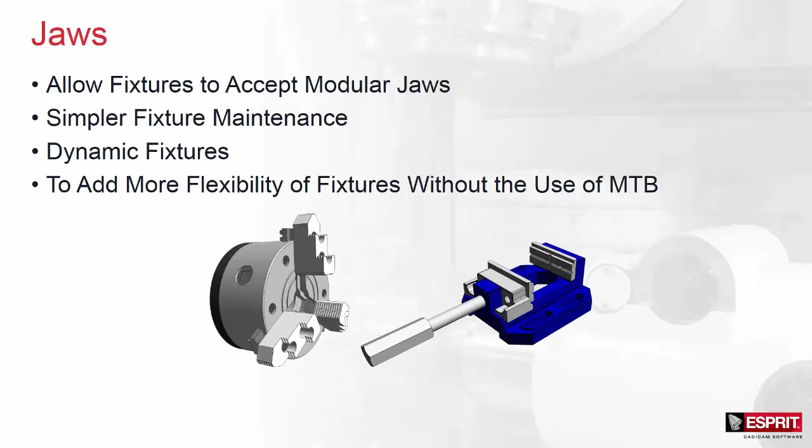Hi, welcome to the presentation of the new feature Jaws for ESPRIT TNG milestone 3.2. This new feature allows fixtures to accept modular jaws, which also leads to simpler fixture maintenance. Now we can just swap jaws in and out for our chucks or vise fixtures without having to make a new fixture just because we swapped out a jaw.

Next, we have a list of some of the new features. First, we can change the clamp direction. So now instead of having an OD chuck and an ID chuck, we can just have one chuck fixture, and with a simple click of a button in ETNG, we can swap the direction in which that chuck clamps.

Second, we can change the clamp position. So depending on the travel limits, maybe you want to extend or make them smaller, you can change the clamping position easily inside the UI. Third, we can do some model positioning. If you saved the solid wrong or you have a uniquely designed chuck fixture, you can position the jaws accordingly.

And lastly, you can save assemblies. So now if you have a chuck and let's say you use this chuck consistently and you don't want to keep adding the same jaws over and over to that file, you can right click and save that fixture assembly.

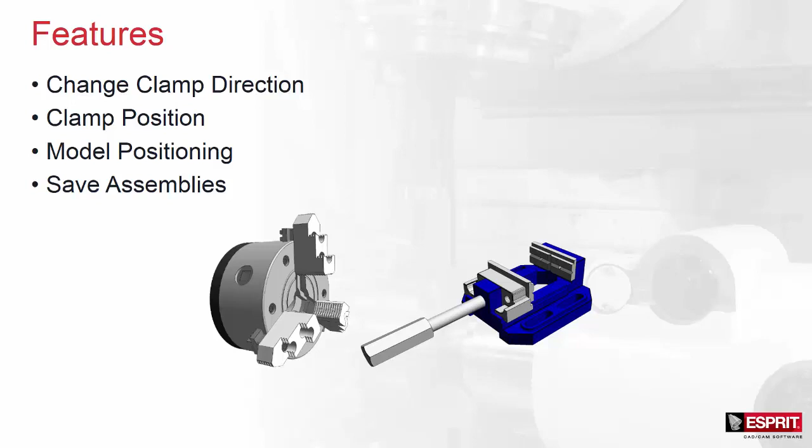So let's go ahead and see what this looks like in ETNG. So you can see here I have my fixture file loaded up. There's nothing different than how we saved fixtures before. The origin still denotes where the workpiece adapter and fixture adapter location is.

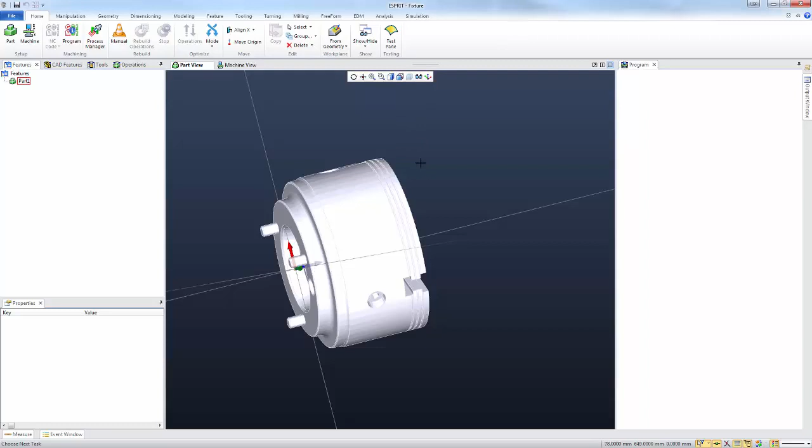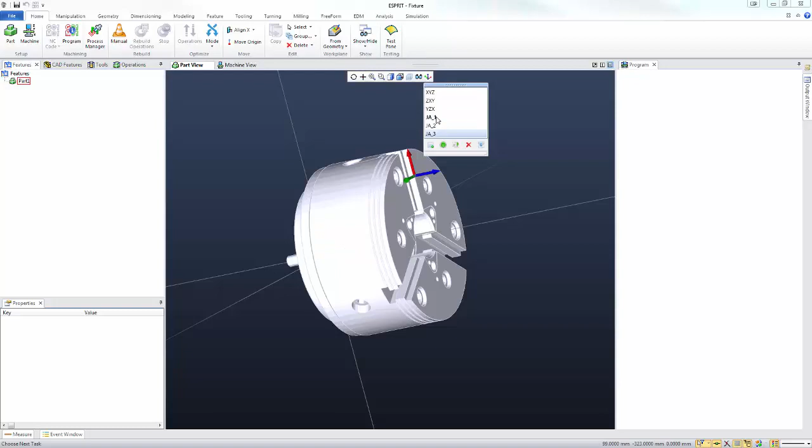The only thing different now is I've created some new adapters called JA, and the JA denotes where the jaw adapters will go. And then anything after the underscore is just the name of the jaw adapter. But I labeled it 1, 2, and 3 just to be in numerical order. So let's go see where this first work plane is at. You can see it's located here.

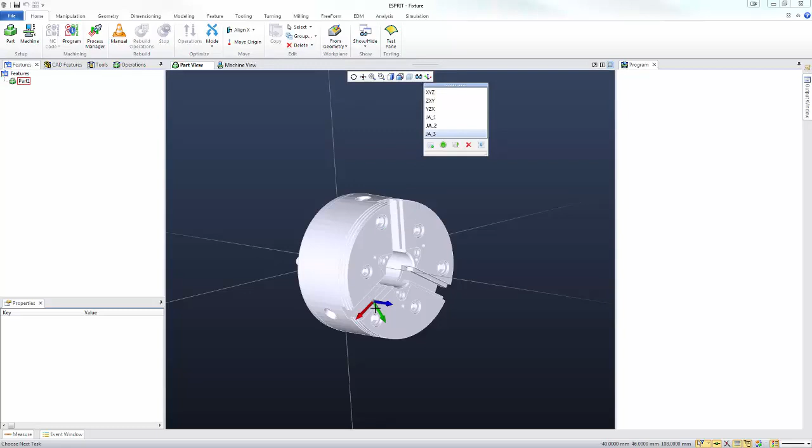And what's important to note is the orientation of that work plane. Z is coming out, and then the X direction denotes how the jaw will travel. So the jaws move in the negative X direction, so keep that in mind. And all I did from there is I rotated this work plane 120 degrees to be located in the same spot on the other slots.

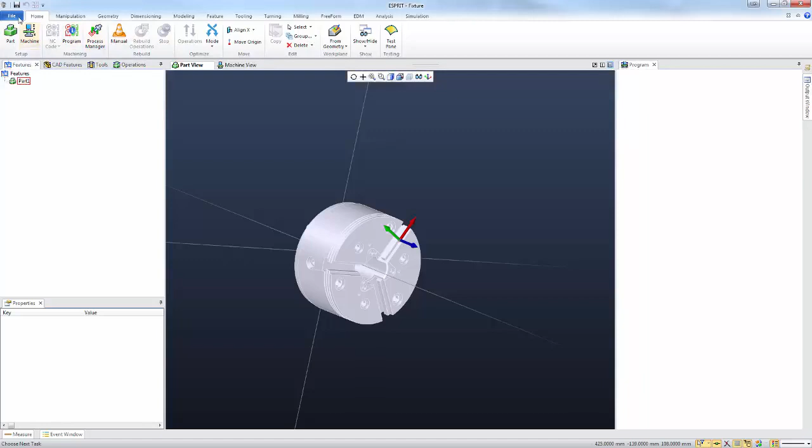From there, all you do is save as, just like you've done before. Save it as a fixture file, and you're done. Let's go ahead and see what jaws look like. So I'm going to go ahead and open this jaw file. Again, like fixtures, you can see Z is coming out, and what's important to note is the X-axis, because that's how this jaw is going to move. We don't need to make any work planes, you just save it as is.

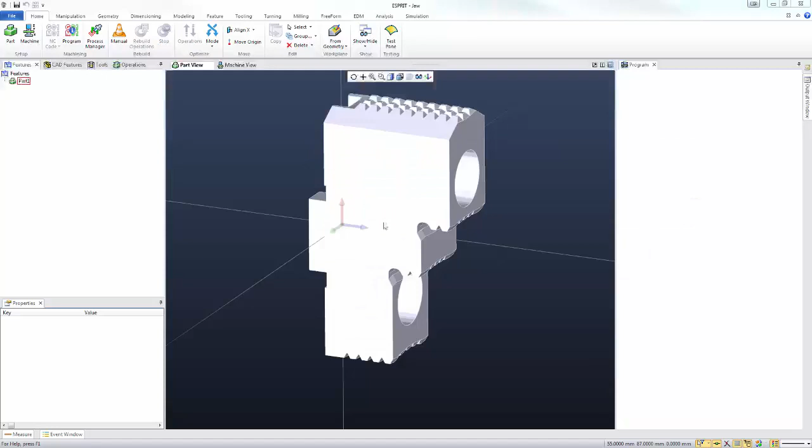So what you do is you go to File, Save As, and if you click down here, you have this new option called Jaw Files. Just call it Jaw and we'll save it there. So let's go ahead and load up a sample file. So we can see in the machine view, I have a legacy chuck here.

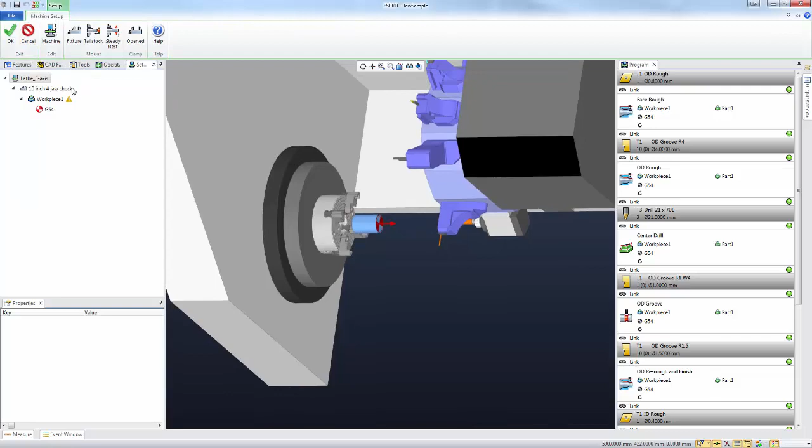I need to swap that out for this new fixture that accepts modular jaws. Now when I click on the fixture, we have a new option here called jaws, but since it's a legacy file that doesn't have any of these new jaw adapters in the file, it won't have the feature. So let's swap this out for the new chuck that we created.

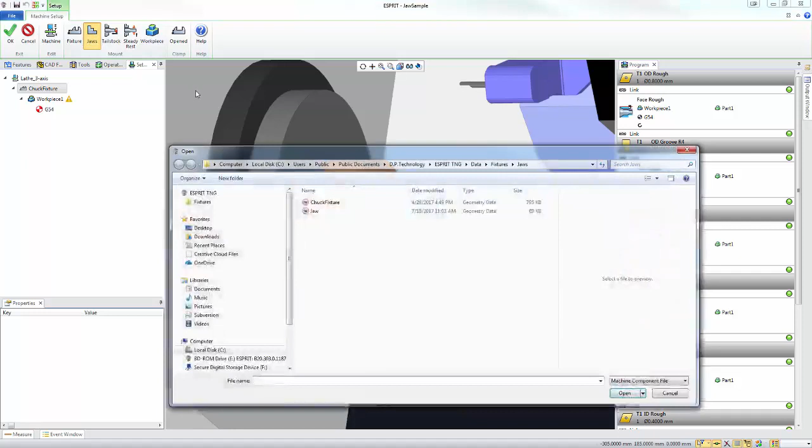Click on OK. Since this chuck fixture has those jaw adapter locations, we have this new icon here called jaws. So let's click on that. Let's add the new jaw that we created earlier. And you can see the jaws are added as such.

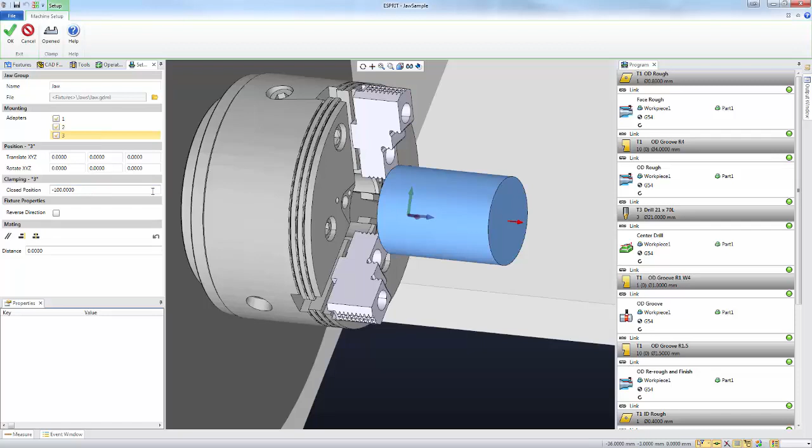And then each of these jaws has their own positioning, so if one jaw needed to be positioned a little differently than the other, you can do so here. And they also have their own individual clamping directions. Also, you can see we have this fixture property reverse direction, which will swap how the jaws are oriented and the direction in which they clamp. So now we have an OD and ID fixture all in one.

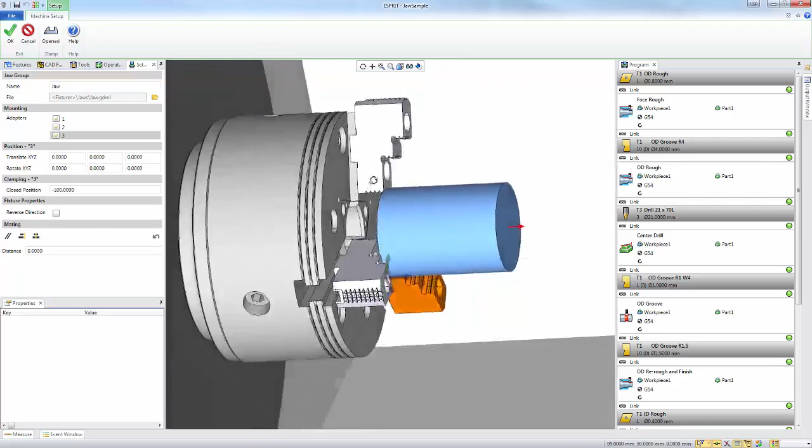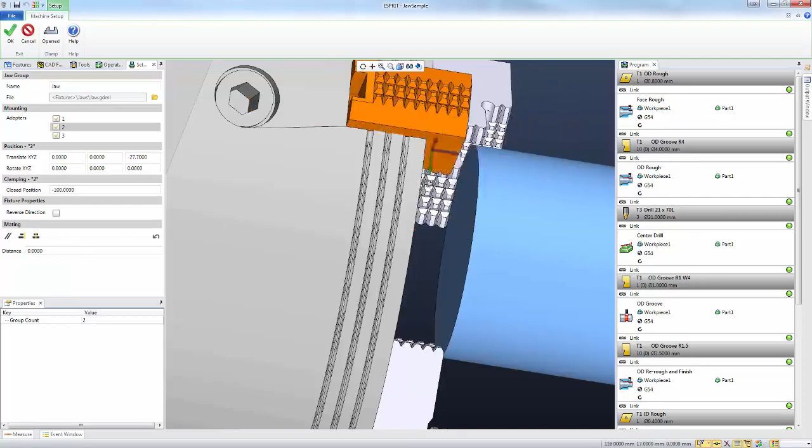And lastly, we have the mating option. So you can mate the jaws into any specific locations that you want if you need something more finite or granular. So for example, if I wanted to move this jaw, I would mate this face and maybe this face. And we'll call them aligned. You can see it's positioned as such.

Click on OK. You can see we have this new component here for jaws. Click OK. Everything works through. You see it clamps properly. The file will simulate just fine.

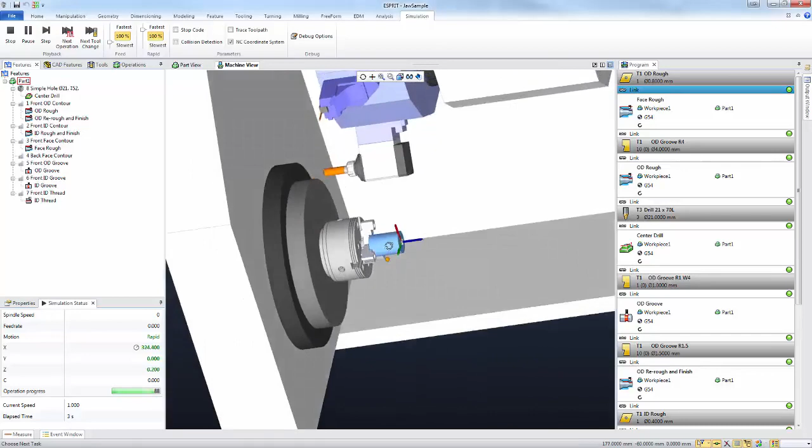So that is the new feature Jaws for ESPRIT TNG. Thank you for your time and have a good day.